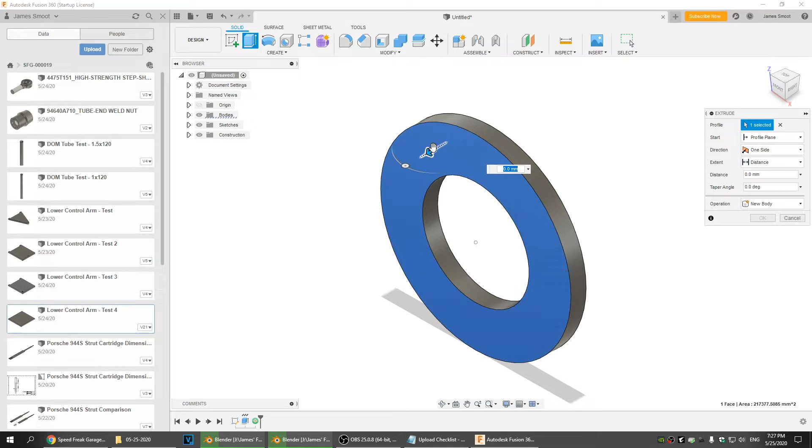Then we need to — and it's kind of funny, I don't remember how wide the original wheel was. I believe it was a 7-inch. So we're going to do 7-inch, 7 minus 2. So that looks about right, honestly. It might be an 8-inch. I want to say it's a 7-inch.

So now you'll notice that although this is correct as far as the offset, it's not correct to where the ball joint really is, which is down here somewhere. So to do that, and it's not going to be easy, we need a 4.5-inch offset.

So I believe I can do an offset plane that's 4.5-inch. That didn't come out right.

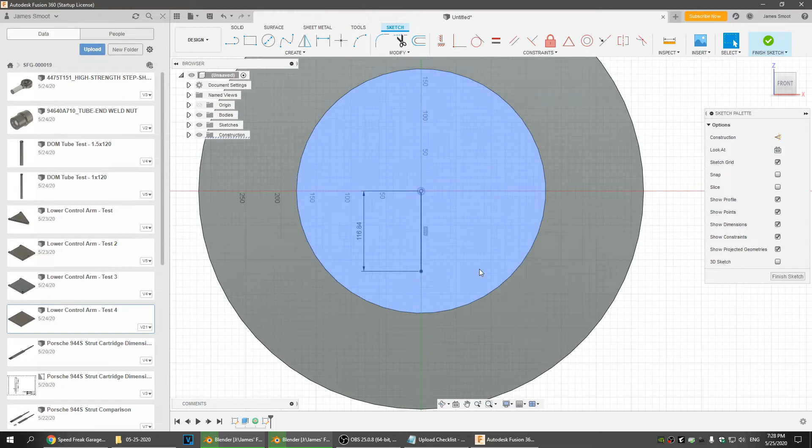And what would be the best way to do this? Okay, let's back up. Create sketch, and then from that sketch we are going to draw a line that's 4.5 inches. Okay, and that seems to look about right, comparable to what we were seeing with the car.

So now we need to finish the sketch, and then create a new point right there. Okay, now we can hide our first point, hide our sketch, and finish off the wheel, which was a 5-inch extra tire there. Okay, so now we have our proper control point. We can save it as rally wheel and tire.

Okay, so we can close that. Now we can create a new design. So what we're going to do...

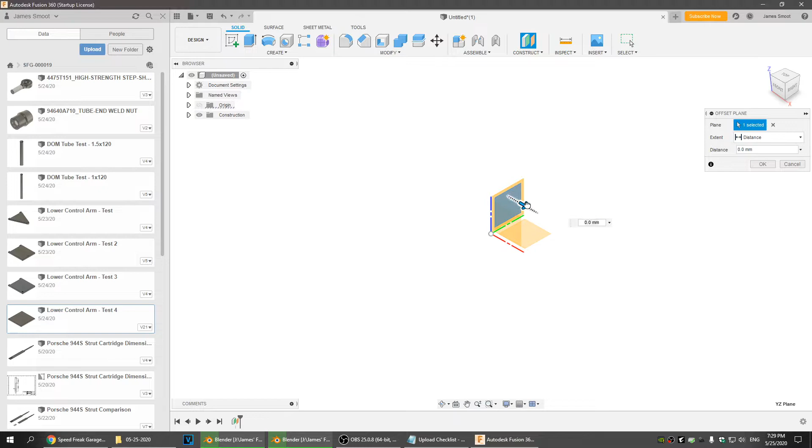We're going to use offset planes simply because this will make this a lot easier. So we're going to create a plane here, then create an offset plane that is 10 millimeters out. Okay, and then we'll create a plane that is 62 millimeters out.

Guys, if you've just finished watching the previous video, you'll understand what I'm doing. 10 millimeters out, then it is 264 millimeters out, and then it is 45.

Okay, so this is the simulation of the vehicle's mounting. So this is our subframe. This is our — let's call it a caster block. I don't really know what the proper term is.

Now we want to create a work axis perpendicular at point. No, shit. Axis perpendicular to face at point. What the f is going on? Okay, might be a little harder.

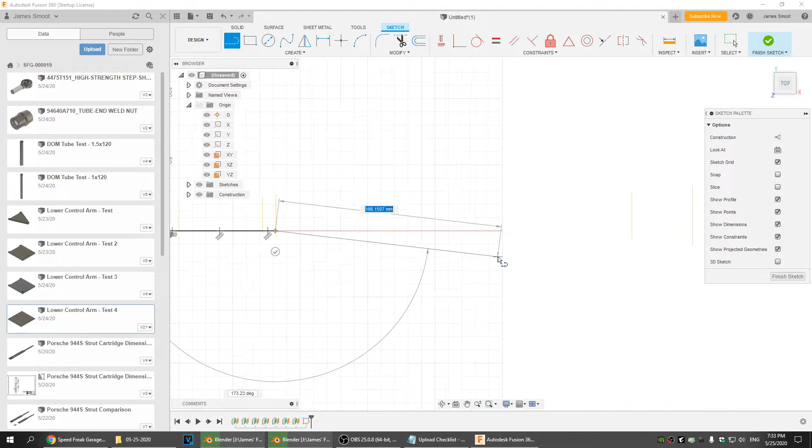So I might have to create a sketch just to get what I want out of this. Not really behaving like I had hoped. Line there, there, there. Should be able to do this whole thing with these construction planes, points, and lines, but this software has some very frustrating limitations that really aren't necessary.

They just don't want to add the feature that's been standard on other CAD programs for a decade. Okay, we're going to call that 10, and that was 62, so we're basically doing the same work twice just to fix the limitations in the software. 10, this is 264, this was 5, okay, this is 365.

Okay, and then we need a line here that is 22. I know this doesn't appear to make much sense right now, but it should hopefully.

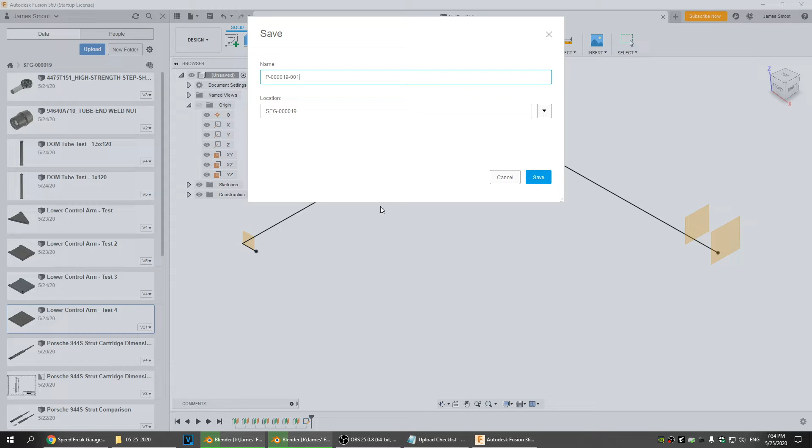We're going to call this... just ignore that, that's something for me. Now I can come back and create the axes that I wanted.

Create an axis through here, here. Okay, then I can create work points here, here.

There. There. There. There. Finally. Here. And here. And I want to go down and create a point here.

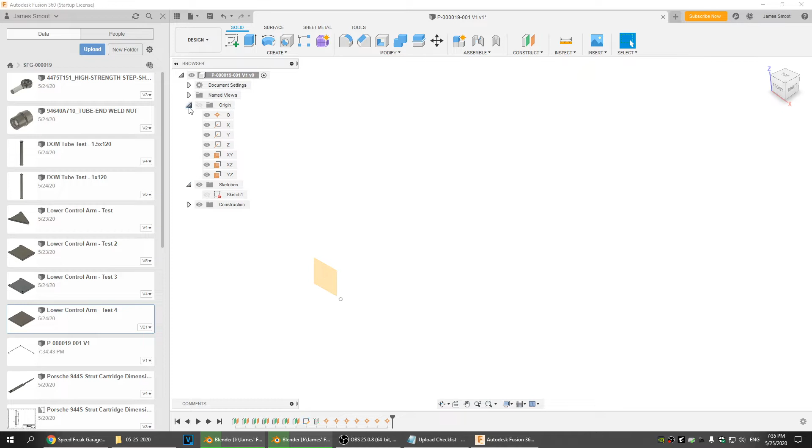Okay, so now I should be able to get rid of that sketch. And then I can get rid of this construction plane. The others I'm going to leave, and I think I might have to keep that axis for now.

Now what we're going to do is come in and start working on simulating the wheel and tire, control arm, and everything. So we're going to bring in our wheel and tire.

Then we are going to create a joint, revolute. It's going to be this to this. Oh yeah.

Then what we're going to do is — I forgot to measure it while it was on the car, but I did some basic math for the turning circle and estimated the steering angle based on that. In this case it's going to have a minimum of -45, I think 45 is actually too much, but a maximum of 45. I think the calculation was more like 40 degrees or so.

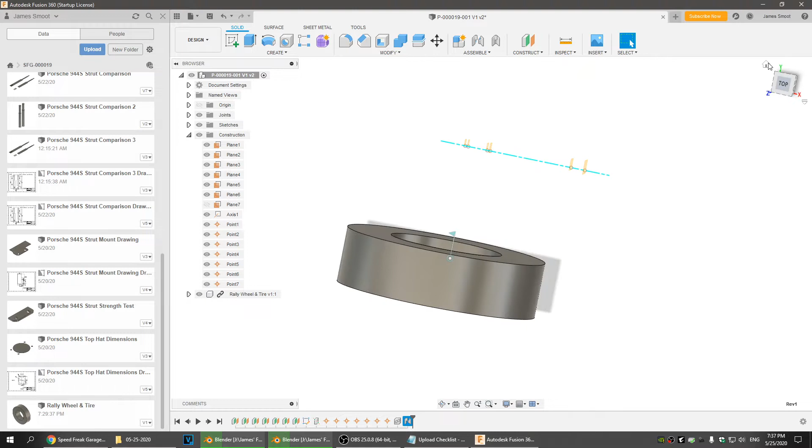I really screwed up, I'm basically going to have to go back out to the car and probably put it all back together to measure my steering angle properly, but this is what we've got for now. So do 45 degrees, worst case scenario steering angle, save.

So now we're supposed to be able to drive this joint. There we go. So we put our wheel and tire in the worst possible configuration, and that gives us an idea of where we can and cannot run our control arm.

Oh, come on. Stay. There it is. Okay.

Now to draw the control arm is going to be a little more complicated, so we need to bring in our Heim joints. For now we're just going to assume I'm going to use the industry standard Heim joints used in most off-road custom suspensions, which are half inch inside with a 5/8 by 18 thread. It's a really big, beefy, very strong joint.

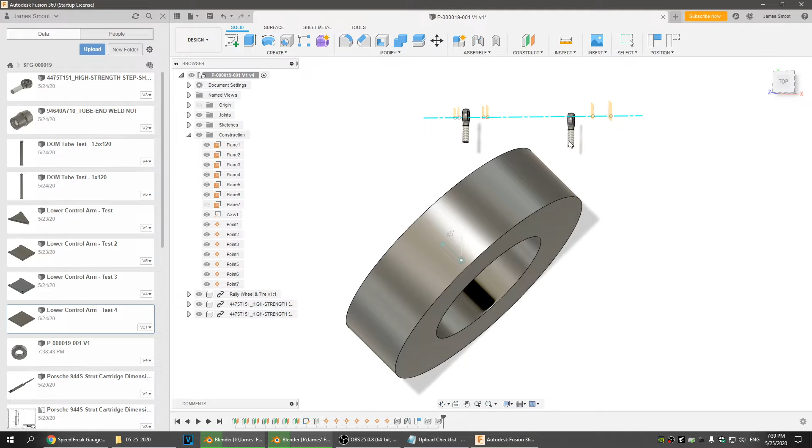Then I need another one. So it brings it in at the wrong angle again. Okay, drag it over for now. And then we need to, come on.

Okay, so now we need to join these and make sure they're rotational. So we grab the center of this, and we're going to stick it here. Oh, that's not good, it's the wrong one.

Oh boy. Can I select the axis? No, shit. Well, that's not good. Okay, what about that? It's not letting me. That's a problem, that is a problem.

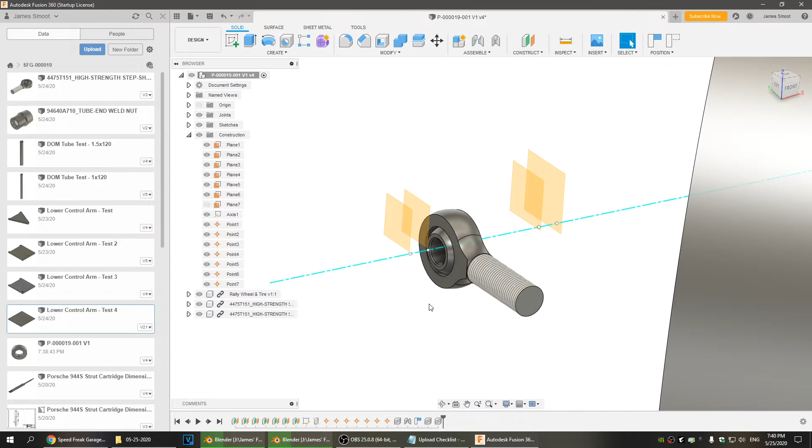If I did a rigid joint there to there... shit. Great, great. Oh man, see, I didn't want to have to do it the hard way. God, that's shit, okay.

There's got to be a way to... alright, let's do this, do planar from here.

Wait, I can't select a plane for a planar joint? What? Planar joint. You've got to be kidding me. Why? Oh, that makes my head hurt, of all the stupid... Yeah, okay, so... that really makes me mad.

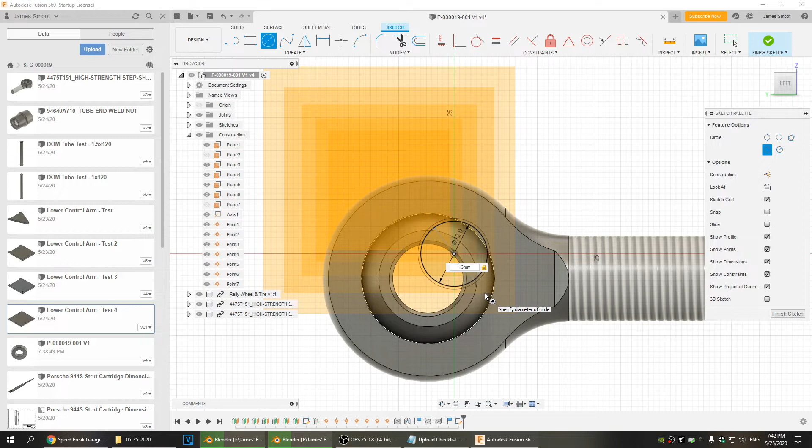We're gonna go -10, okay. Then as built that. Oops. I'm gonna lock this to the origin. No, that's not working either. It makes me so mad. Okay, alright.

Let's... same thing, 12, 20. Okay, extrude. What was it? It was 5. Where'd that plane go?

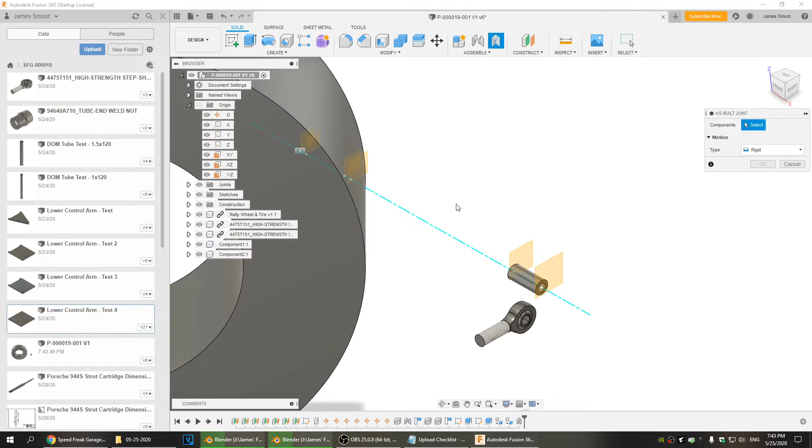Okay, so now we have those two features in there, I think I can convert them to create component. So then we do the as-built joint, which is this component rigid to the origin. Okay, as-built joint, rigid to the origin. There we go.

Now we can do our moving joint, which is the revolute of that to that. For now we're not going to put any kind of spacer in it, although we probably would need one. I don't know if it'd be a good idea to center it here, but this is what we'll do for now.

Now this one, same thing, joint from here to here.

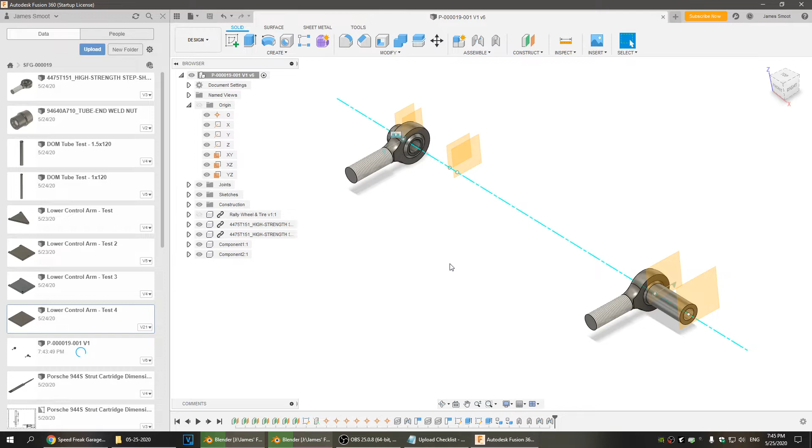Let's get the wheel and tire out of my way for a second. Okay, save. Yeah, I really screwed up by not measuring the steering angle. Kind of not good, so anyway.

Alright, so now we have to add our tube end weld nut.

Another one. So what this does is it adapts the threads to the tube. In this case, we're going to be using some pretty large 1.5 inch DOM tube, which is very strong, twice as strong as what they've used for the factory stuff.

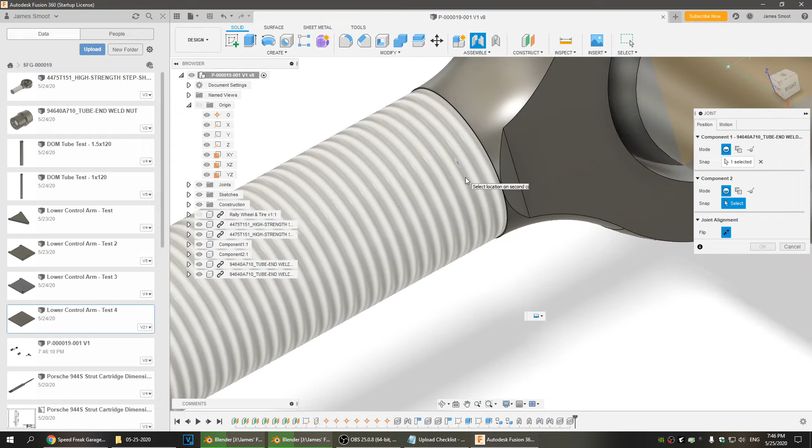So it's going to be attached. Don't give me shit today. There. Okay, this attached there. Okay, before we start drawing, I need to set joints. Where's joints here?

For edit limits. Okay, edits, so that way they can't spin for the time being and mess everything up.

So now we have the location of our ball joint, which is basically straight on this tube, which is not good. Something I'm not sure how I'm going to deal with, honestly, because we need to have a full piece of tube supporting the ball joint, and that's not going to happen with this.

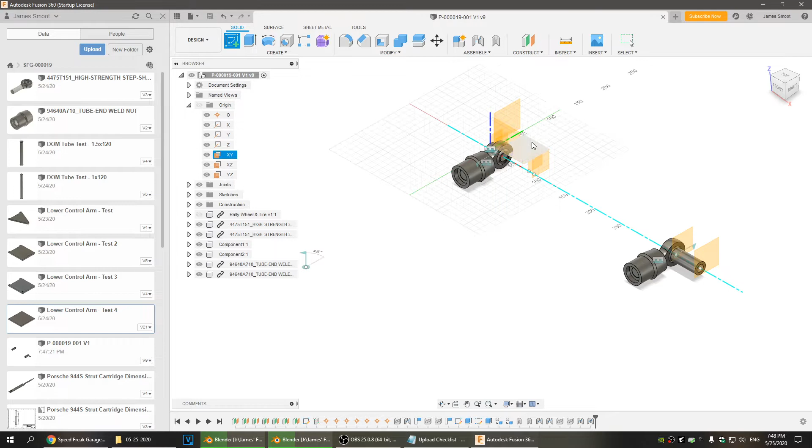But what we can do is create a simple simulation to kind of simulate the shape that we want. So what we're going to do is start a sketch, then we're going to project this.

Let's see, 0.7. Okay, and we're going to project that and that onto the sketch. So then we can go ahead and simulate our DOM tube. So what we'll do...

We determined the ball joint was a 42 millimeter ball joint. Then the DOM tube is going to be a little harder to simulate, but luckily we don't have to simulate all of it. We just have to kind of, well, you'll see.

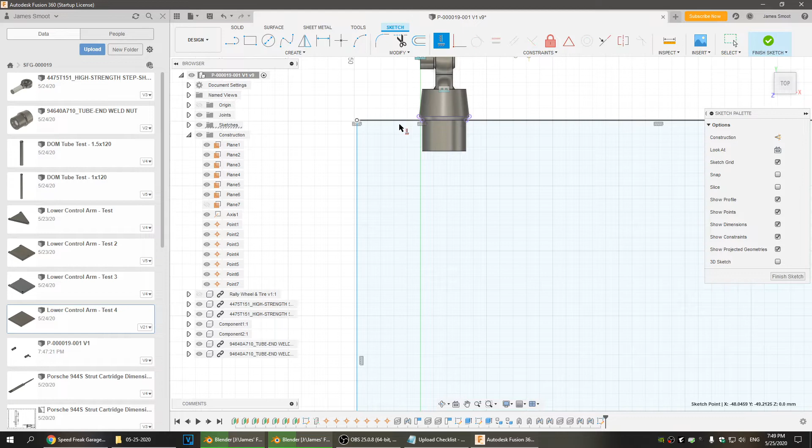So we're going to do that, and then we're going to have to project that and that. Okay, then we're going to limit this to there and this to there. Then if you come back and look at our tire and wheel, oof, yeah, doesn't look so good, does it? I mean, the tire is right there.

It really makes me think I'm going to have to go back and reassemble the whole car back together so I can... I really don't want to do that though. So I can measure the steering angle. I might be able to just measure the steering angle on the right side of the car, because this 45 degrees just, man, it does not give me hope. Like if I say 40 degrees...

It still doesn't give me much hope. Wow, it's really concerning.

Anyway, okay, hide the wheel and tire again, we'll have to deal with that later. So we have, and I can always 3D print the A-arm in full size and install it on the car. I mean, it's not going to hold any weight, of course, but it might help me determine if we've got a problem or not.

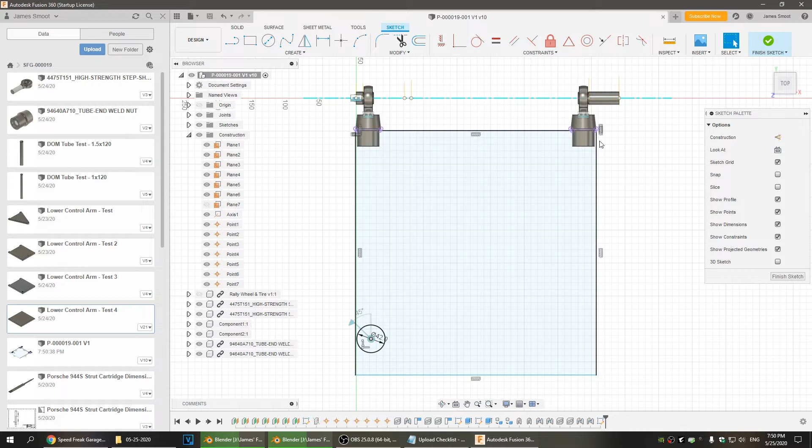So yeah, so we got this, and we've got this. So the only thing we need to do now is just bring this out to like, well, we're only going to be able to, the ball joint, you'll see whenever I have to do the ball joint, but we're going to do this to there. Okay, finish. Now we're going to extrude...

Just this piece. Oops. Symmetrically, and the whole length is going to be 1.5 inches. And we're doing a new body, so it's an independent body. The only thing we need to worry about is this face here, so create a sketch.

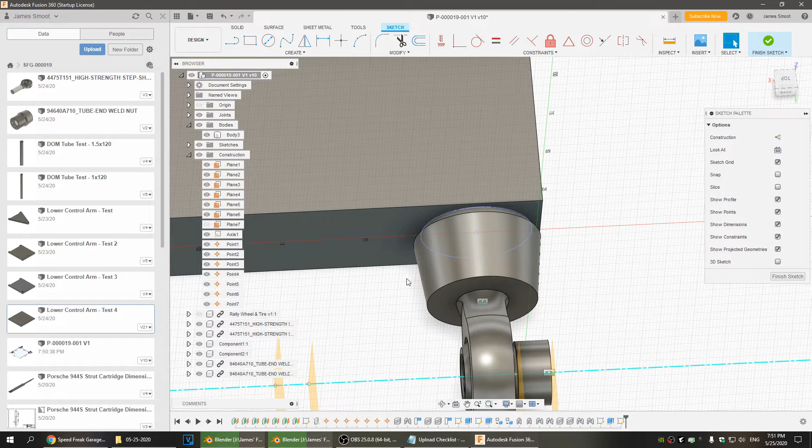And we're going to project this and this, okay? And then finish sketch, we're going to extrude that to match. Oh, that's frustrating. Oops. We're going to cut it in 1 inch to match. So, okay.

So this looks odd, like trust me, I know it looks odd, but it will tell us a lot of information that we need to know. One of the things we need to do first is grab these two edges, 0.5 inch.

Okay, ooh, that wasn't right, hold on. Oh yeah, 7.5, okay. Save, now we should be able to go straight into our simulation.

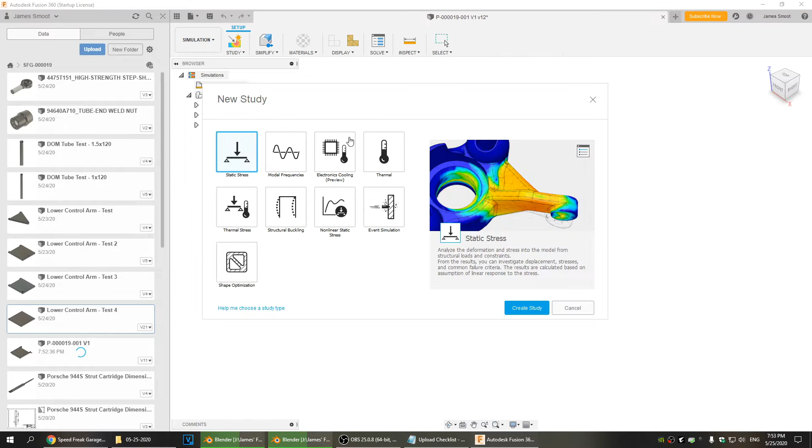So shape optimization, create study. No, that's not going to work. Delete study. Cancel, okay, sorry, we're going to have to...

Thought there was a way to keep certain components out of the study. Maybe not. Alright, we're gonna have to try it this way.

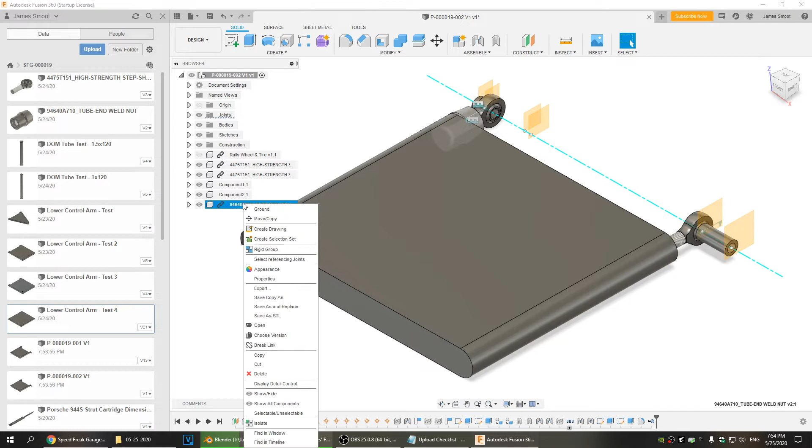We're gonna save a separate file. And then we're going to come in and it's referenced. Oh boy, should be a remove option. There it is, remove. I have to break the link and remove. Break link, remove, break link, remove, break. Okay, so we're just left with this really weird looking piece.

Now we can go to simulate, create study. Okay, material will be, I believe it was 1020 hot rolled. Okay, so we're choosing our steel. Now our constraints will be this and this will be fixed in place.

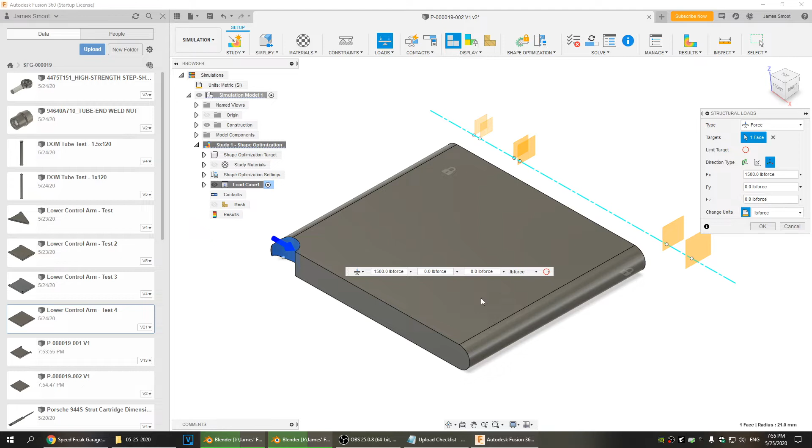Okay, then our force will be in pound force. Let's see. Oh, that's the wrong direction. I think we want it this way. Yeah, so we're going to do half the weight of the car, or 1,500 pound force, which is way more than this will ever see, but we're just going to do this for the simulation.

Okay, save. Now we want to go to settings, mesh, 1, 2, 3%. So it's going to generate a mesh real quick. Normally real quick. Okay, there. So now we have all these little pieces that it uses to simulate.

Then we solve, and I wish I could solve it locally. It won't let you solve it on your own processor. It makes you solve it on the cloud, which is bullshit, because eventually you have to start paying for cloud credits. In this case, it's $1 per credit, so it would cost me $5 just to run this test simulation, not even the final simulation, it's just a test. So that's really frustrating. But it's free for now, but it won't be forever. So I would really hope they add the local option.

Anyway, we're going to run it on the cloud. Should solve pretty quickly. Okay, so we're back. So you can see, just like I showed you earlier, it gives us the same general shape.

Unfortunately, this shape would interfere with the wheel. And I can probably show you that there's a way... like that. There we go. Okay, so we now have our what's considered optimal shape.

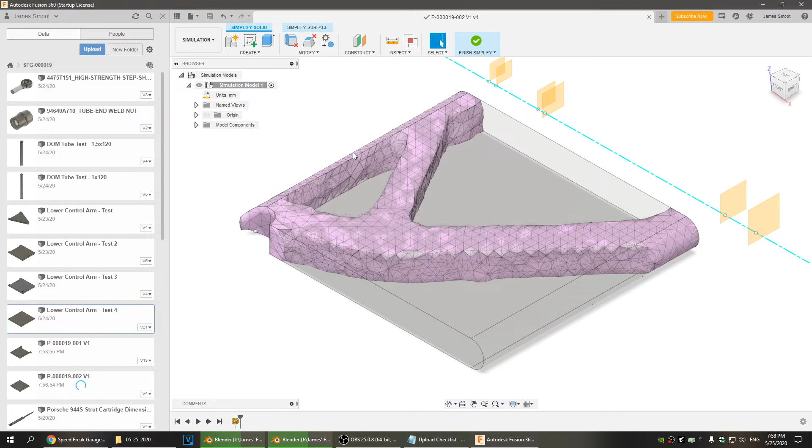And I think we can actually drag this optimal shape back into the main. First, let's kind of clean this up a little bit, shut all this crap off. Save. Okay, go back to version 1. So now we can actually get rid of this body, it's not necessary anymore.

Sketch 5. Okay, save. Then we bring in our... what is this one? Oh, wow, I'm very confused now. Oh, shit. It's not supposed to be that difficult. What is the deal?

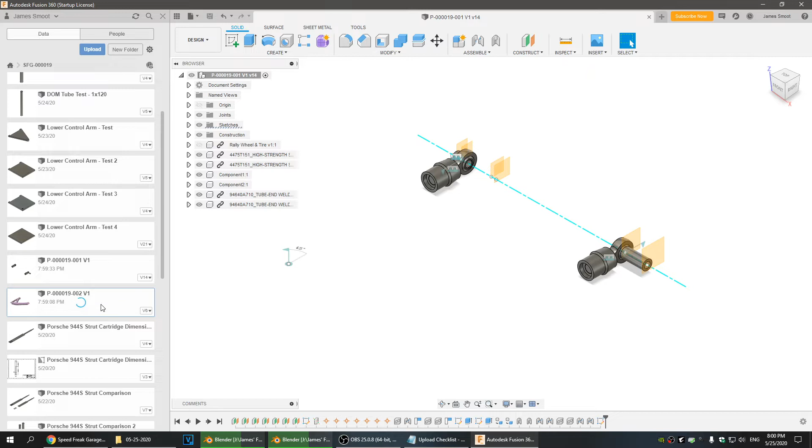Results, convert. Oh, that's why. That's why. There we go, there we go. Save. Okay, now give it a sec. Now we bring it in. There's our optimal design control arm. But look at that.

Rally wheel and tire is right there in it. And again, I'm still a little unsure of if I have the steering angle right, because obviously 20 degrees is completely wrong. But say the car can only steer at 30 degrees, well, then I don't have to deviate from my shape too much. And you have to miss all of this here.

So it's going to be kind of a pain to figure this out without going back out to the car. And yeah, great, just great. I'm gonna have to go back out to the car and get my steering angle figured out first. But I know that we're gonna have issues with all of this, so it's gonna be tough. It's gonna be very tough.

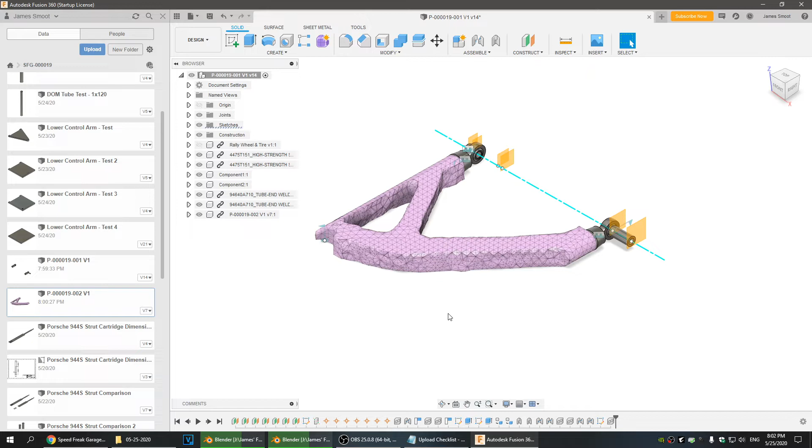Let's see. And the other problem is the center of the ball joint is just, I don't know, it's going to be an issue. Well, it almost needs to be over here with the two pipes behind it, but I don't think that would be strong. So I can't put the Heim joint directly up against this because it won't have enough room to pivot.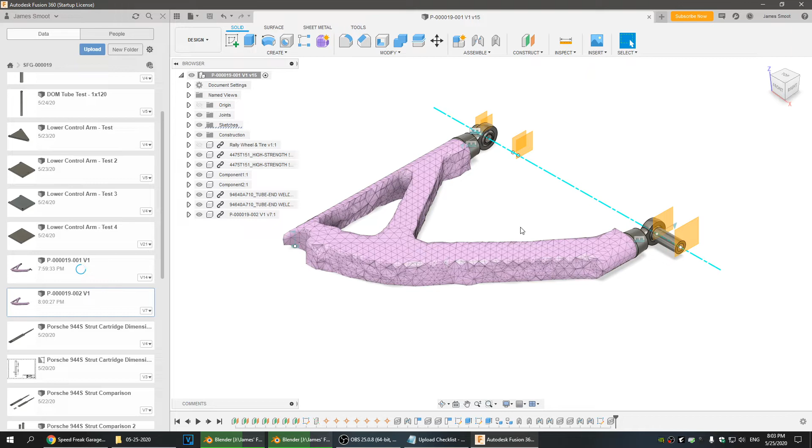There's a little bit of math you can do to figure out how much room it needs and just move it over a little bit. And same for over here, take this one and move it over a little bit. Granted, this one isn't the right size for this. So, but yeah, I'm gonna have to go back out to the car, measure the steering angle somehow. I don't even know how I'm gonna do that. And then I will come back and update our wheel and tire simulation so that it's correct.

Okay, so we're back, and based on the measurements I took, it looks like about 32 degrees, but we're going to be a little safe and do 35 degrees. I think I'm just going to have to suck it up and 3D print a mock-up to make sure that it clears. Granted, I don't know how well a 3D printed mock-up would withstand even turning the wheel, but we'll figure that out later.

Alright, so we've got the wheel at 35 degrees. Now you can see that still leaves us with quite a bit of a problem. So what we're going to do is get this out of our way.

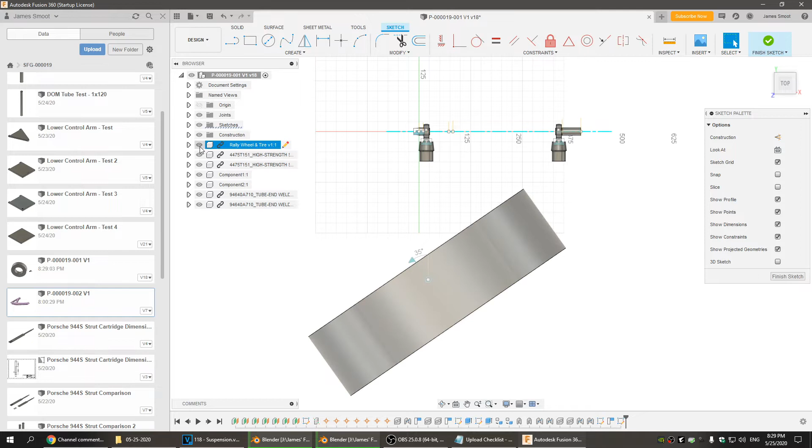And we're going to do what we did before, which is create a sketch. Then we're going to hide our wheel real quick, and we're going to project that. It's going to be a little more complex this time, so just bear with me.

We are going to draw our circle around the ball joint at 42 millimeters. We're going to take our rectangle, just draw it out here for a sec. And we're going to align it back up like we did before - there to there, there to there, and here to here. Now we have to make a clearance for the wheel.

If we look at this design here, you can actually see it left space here. So wherever this hole was, basically, it left space for it, which I won't pretend to understand why, but we're going to have to do the same thing. So what we'll do, we know we have a 1.5 inch pipe.

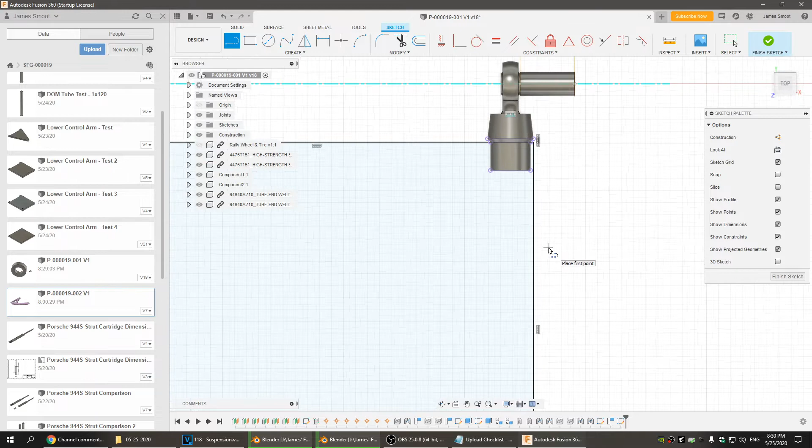So we're going to draw a line - hold on, I gotta project this. We're going to draw a line. It's going to be 1.5 inch to simulate the pipe size. And then it's going to come over here, and we'll have to do a little math, but we're going to do 2 inch for now. We'll come back and fix that later.

Then we need to turn our wheel back on. You can see we're already very close, and we might have to tweak that a little more. Let's do 1.5 inch. Okay.

Now what I'm going to do is draw an arc, and it's just going to kind of sit here for now, with a 5-inch radius. That's because a friend of mine in town has a pipe bender, and he believes it's a 5-inch radius. If it's not, we can always come back and correct that later, but for now, that's what we're going to go with.

So we are going to connect this to here. Well, I guess we want a tangent so we can kind of see what I'm doing. And then we want to do the same down here.

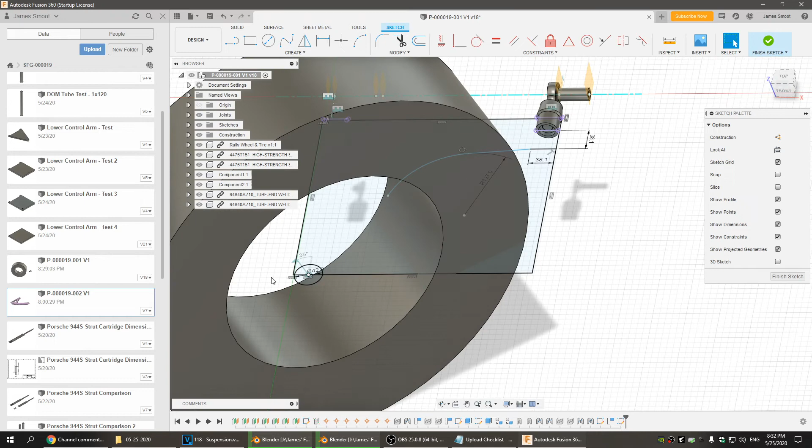We want this pipe to clear the wheel just enough to basically have room. And what we're doing is we're going to have to draw a line here. Then the dimension will have to be 3 inch since we have two 1.5 inch pipes coming together. So for strength, we want both pipes to be fully formed.

Okay, so then we're going to dimension this off. Again, we want to leave some space, so maybe 1 inch. That's probably not enough actually, because the pipe's gonna... okay, let's do it this way.

Let's draw the line from here to here, and then tangent that line down to the edge of the ball joint. So the pipe will extend pretty much to the edge of the ball joint. Again, there's some tweaking we can do to allow for welding space and things like that, but that's what we're going to go with. And then we're going to bring this line down here, and it's going to tangent to here.

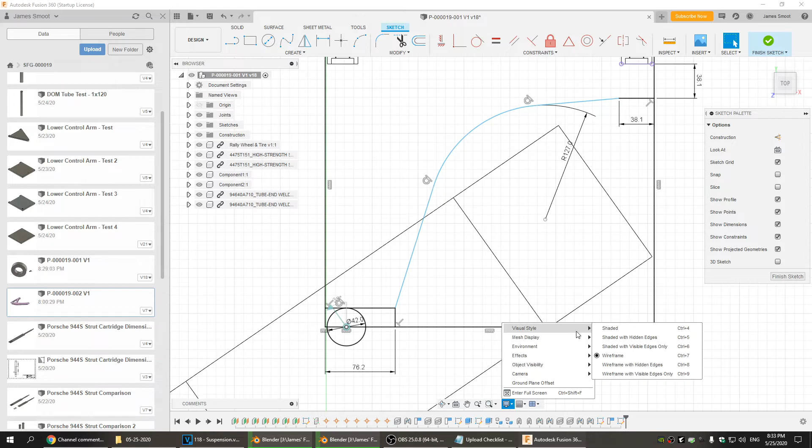Okay, so now I need to change our display settings to wireframe. So see there - actually that doesn't help me much, does it? Sorry, let's go back. Yep, we're just going to have to do it this way.

So we can see that we have a contact here on the barrel of the wheel, and we can kind of move. So what we want to do is develop the strongest possible link that doesn't contact the wheel. But then, of course, we need - well, what would happen if I projected this onto the sketch?

And then if I put a point, I can't do an intersection point, so I'll just zoom in really far and guess it, then lock it in place. And then do the same over here — zoom in really far, kind of guess that point, lock it in place. Okay, so now we can turn the wheel back off to get it out of our way, and we've got our 2 points.

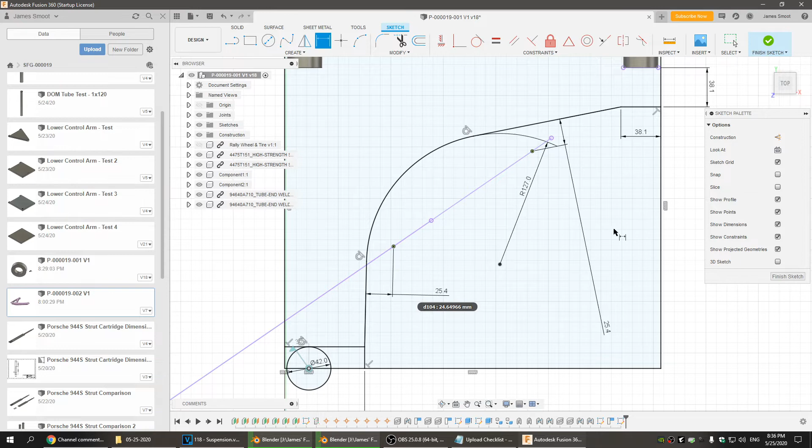So the original vehicle had a, what you'd call, I'm not really sure how to describe it. It had a... can I dimension that to that? I can. It was a 1 3/4 inch clearance, so let's say we do a 1 inch clearance — let's tighten that up. This one would be the same, so we'd do... oof, that's not gonna work. There we go, we do 1 inch. So we're giving ourselves 1 inch around.

Okay. Then we're coming down here like this. Alright, so finish sketch. Gonna save.

Now we're going to extrude this profile, this piece, and this piece. And we're gonna... ooh, I made a mistake. Well, you'll see here in a sec, but — symmetric, total distance, 1.5 inches. And then we're gonna come through and do our radiuses so that everything...

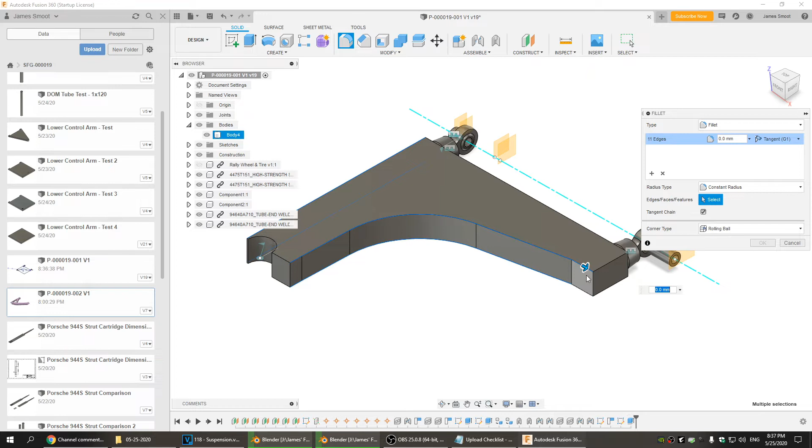Ooh, that didn't turn out like I wanted. That's also not really what I wanted, but how can I fix that? That should be pretty simple to fix, actually.

Create our sketch. We will come on, project that and that. Okay, and then we're going to hide them. So we can then fix that.

First thing I'll do is take this and, whoops, extrude it out. What did I do, 2 inch? No, 2.5. Well, okay, that's a little confusing. Hold on, we're gonna have to go back. Back. 61.9125. Okay.

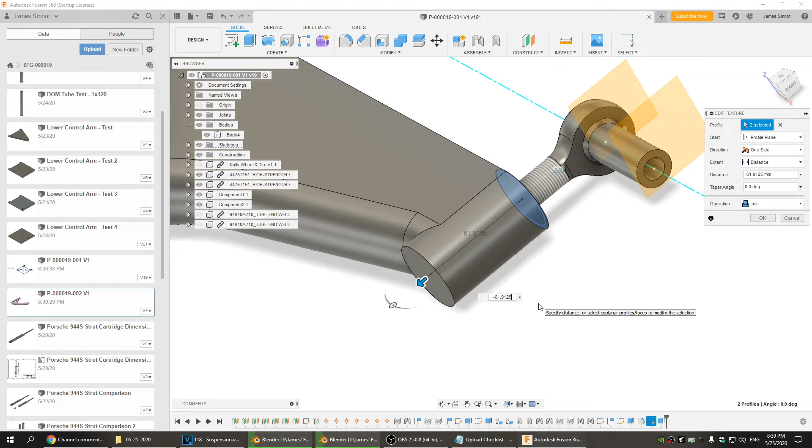There we go, okay. So that basically simulates the tube — this tube running into this tube. I actually, crap. Nope. Okay, you guys kind of see where I'm going with this, hopefully. So, and it's actually kind of looking like the original, which I don't know if that's encouraging or not.

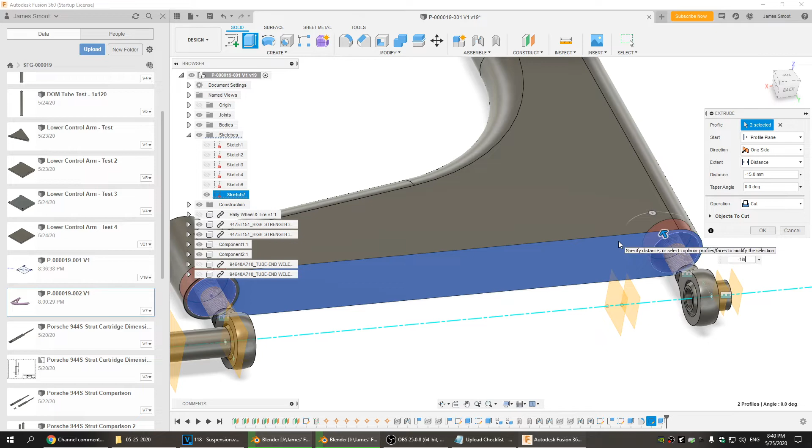So let's see, we've got that, we've got this, and oh yeah, and then I need the holes, so we've gotta go back to these sketches, and they just go down an inch, negative 1 inch. Okay, I can unhide these.

Okay, now I'm gonna override — well, actually, no, I will not. I will save it as a totally new one.

And we have to go through the whole process again. We have to break, remove, break, remove, break, remove, again and again and again.

Okay, so now we're only left — and we'll turn off all this construction stuff. And there's a sketch that's on — turn the sketch off. Okay, go back to number 1 for a sec so I can turn that sketch off that I left on. What? Crap, something's going on. There we go, okay, sketch off.

Okay, and then, oh yeah, so the thing — yeah, got a pretty good amount of room there. Let's see if it'll tell me what the minimum distance is from here to here. 14 millimeters, half an inch. Wow, probably too close, especially for suspension flex and, you know, oof. But it's a prototype.

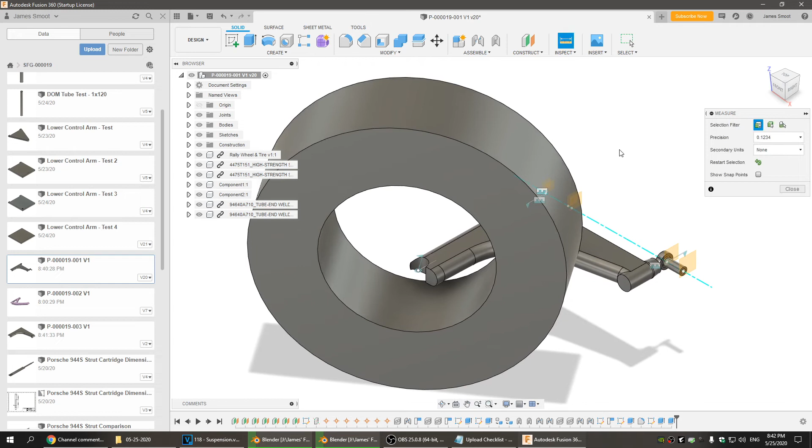Alright, save. Hoping this is assuming it's a 5-inch radius — if it isn't, we'll have to come back and redo all this. But anyway, okay, close this. Go back to here. Now we go to simulation, optimization. Why did it turn all that stuff back on?

Okay, and so what we're gonna do — materials, we're gonna do steel, and it was 1020 hot rolled, okay, because steel, different types of steel have different properties, of course. So constraints — fix there and fix there, okay.

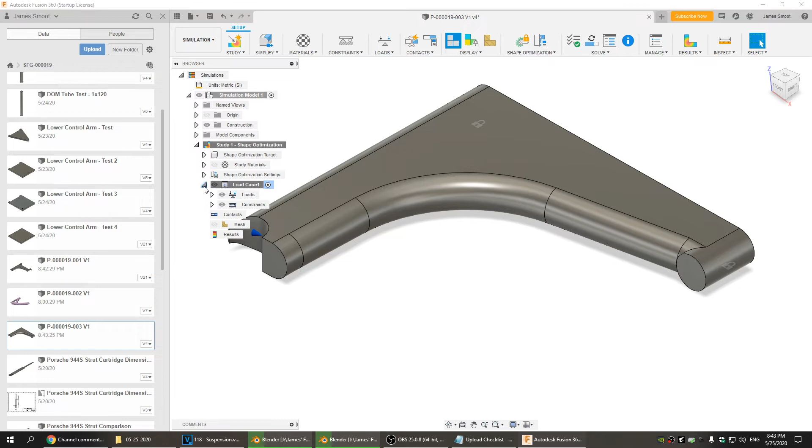Save this again. And then the load, we'll do the same load as before of 1,500 pounds. Whoops. 1,500 pounds. Okay, double check that. What is the deal? Okay, 1,500. Okay, 1,500 pounds. Save. Now we gotta set up our mesh to 3%.

Okay, generate. It's sad because I'm pretty sure my processor on my computer is faster than Autodesk's servers. So yeah, it's frustrating that they solve it for me and I can't just solve it myself. So we're going to go to solve — it forces you to do it on the cloud. We're going to click solve, and then I will come back when it's done.

Okay, so we are back and it's done, and it's basically telling us — it's telling us that we want... oh wow, that's a lot more complex result than I expected. It is a much more complex result than I expected. So it's...

Go back. So it wants us to connect... wow, so it's basically saying — trying to understand these results. It's basically saying it doesn't want us to have this extra here for whatever reason. But why?

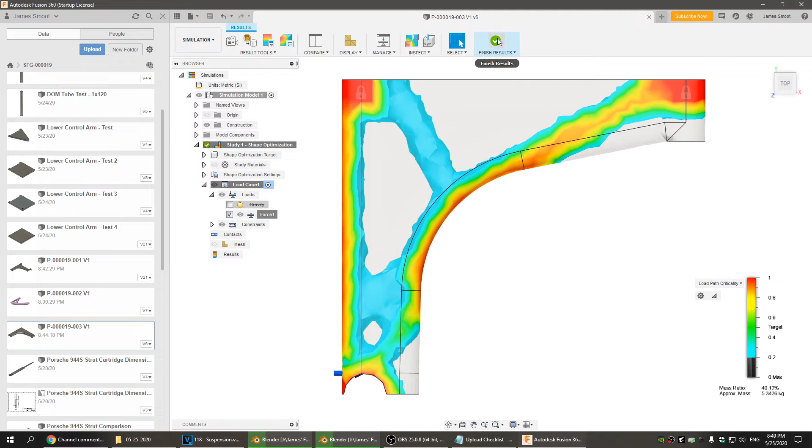Okay, close that, go back to this. Okay, I see, kind of see where it's going.

So we're gonna have to remove this body. And then we're going to create a sketch here. We're going to project this and this, that, that, project that. Okay, so now I'm going to create the pathways to build the tubing, if that makes sense.

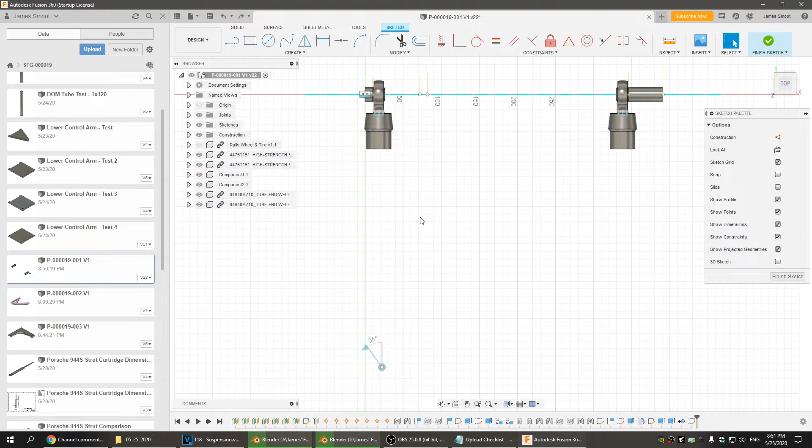Or wait, hold on. No, I'm doing this the hard way. I'm gonna delete that. Delete that. Delete that. Delete that. And this. Okay, sorry. Okay, we're gonna keep all this because I actually need it. So I'm going to develop.

See, we're gonna project this center and this center. And then we're going to draw a line from here down to where we believe the ball joint is going to end. Of course, we need some room for welding. So that's obviously not going to, that's going to be too much, but we'll deal with that later.

And then we're going to, this line's going to have to be fixed. So it basically is saying that it wants me to, oh man, this is going to be a tough one. I'm gonna have to redraw these lines.

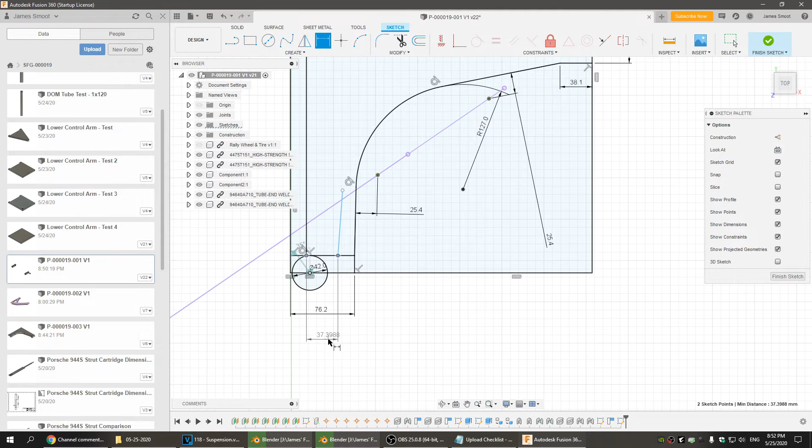So this is just a random line. I don't want any constraints on it except here to here is gonna be 1.5 inch. Okay, then we're going to have a 3-point arc. It's just random. The radius, the arc is 5 inches.

This needs to be tangent. Can kind of move the arc around a little bit now. Okay, and then I want a line from here. See, I don't know how long this has to be. I would assume that the line has to be, let's say if it's 1.5 inch, that's probably too short. Let's do 2 inch. It's a 2-inch line.

And then it wants this to come up. So we would have to draw a line from here to here, tangent, and then we would want the dimension from here to here would have to be 0.75 inch. Okay.

Really, let's do 1 inch. Let's stick it in the center here. Okay.

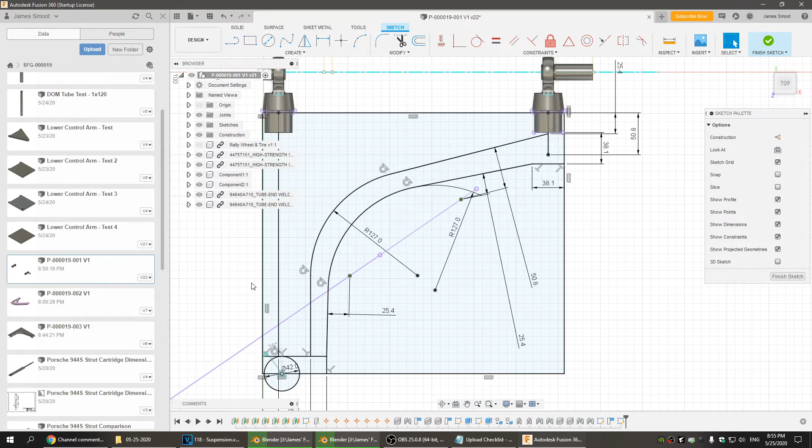We have that pipe, and this pipe. And then the results. As crazy as that looks, I wanted it from here to, man, I don't know what angle that would be.

Let me see if I can guess that angle here. So, oh, okay, okay, I see, 90 degrees.

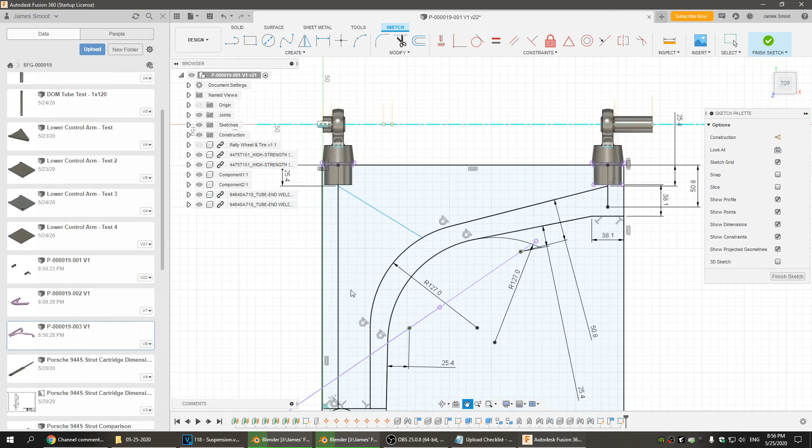So we want a line that goes to here, and then it will have to be 1 inch down, just like this one. Ooh, that's not really working the way I wanted to.

I don't really have any other way to do it though. I'm just gonna have to approximate what it wanted. So let's do, oof, no, that won't work. Okay, I'm gonna have to just half-ass it. Can you do perpendicular to, nope.

No, it didn't work. I could just do 45 degrees. I know that's kind of a cliche, but I'm not really sure what else I'm going to be able to do for now. Okay.

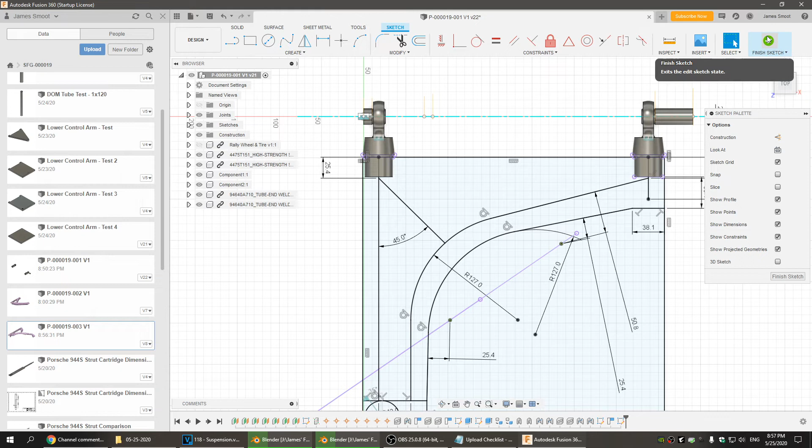And the sketch is invisible again. Okay, so now we have to create sketches. I'm going to have to create a point there.

Ooh, a plane along path. Did they finally listen to people and add what we wanted? Oh, hey, they did. They finally added the plane along path, which is what people have been asking for this whole time.

Okay, so check this out. So if I create a sketch, and circle it 1.5 inch, and sketch... nope, I gotta project it. Yeah, okay. 1.5 inch. Okay.

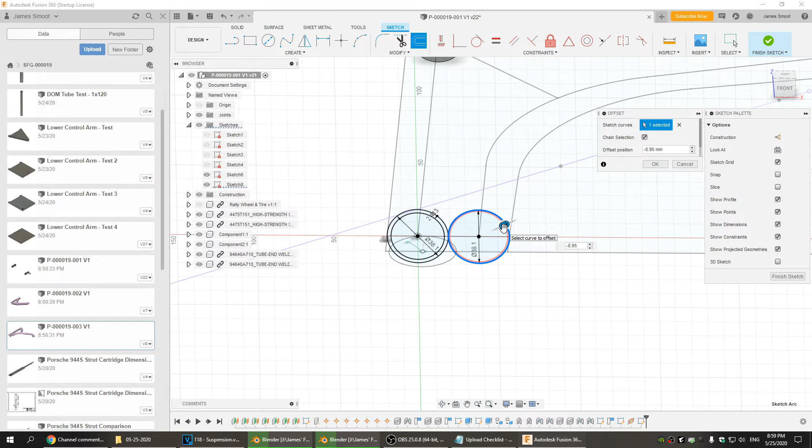Then I need to create the wall. And in this case, we're just going to go with 0.095 inch wall. For now, I probably will have to do a thicker wall once I've run the simulation and see if it's strong enough, which I'm already going to guess it's not going to be strong enough. We'll have to do a thicker wall, and then these tube adapters are going to be a problem, but we'll have to deal with that later.

Okay, so now what we want to do is sweep this profile along this path. Okay, whoa, where'd my sketch go? Then we want to sweep this profile along this path. You guys see where I'm going with this? Yeah. Okay.

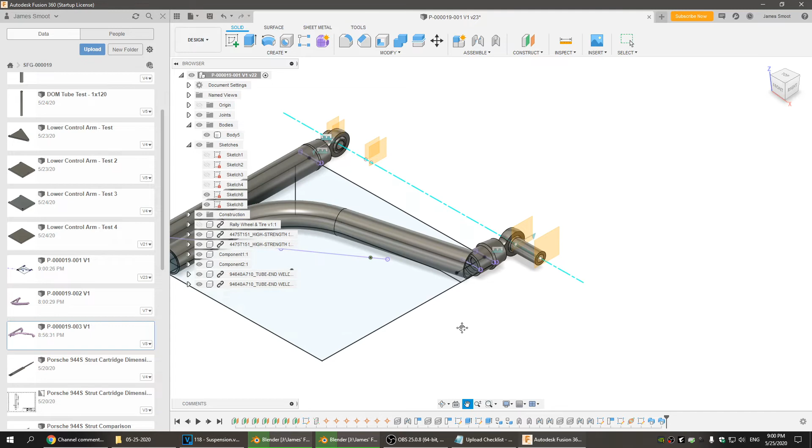We want to join to the original body. We only want one body, otherwise the simulator's gonna have a fit. We got to take care of this problem here in a second.

Okay, so now we want to create a plane along path there at 1. Okay, and then we want to create a sketch, which is 1.5 inch, and then we want to do negative 0.095 inch. I think it was 0.095. Crap, I hope that's right.

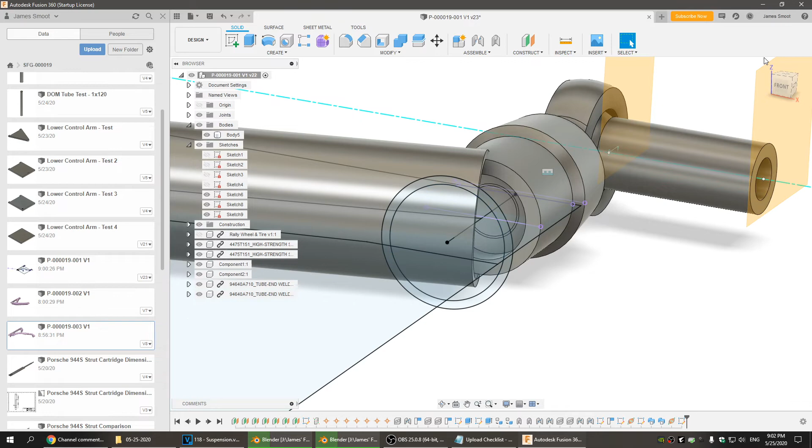This is diameter 33.274. 33.274. Okay, good, I did it right. Okay, now what we're going to do is sweep this profile along this path, join. Okay.

Okay, and then we have to come back and sweep the inner profile along the path, and we're going to cut it. That way we have a hollow tube in there like we want. Okay?

Got a couple more small things to deal with, which is this piece here, which almost doesn't even look necessary. Like this piece here, I don't like how far away it is. I don't know, it's leaving room for this weld here, but it doesn't really leave much in the way of clearance on anything else.

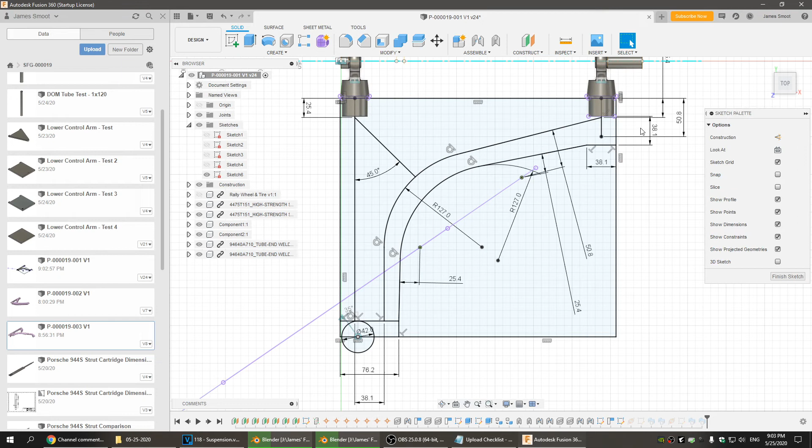So I could probably go all the way back to... nope, not that sketch, this sketch. If I change this to 0.75 inch and hope the whole thing doesn't explode on me. Same here, change this to 0.75 inch. Finish sketch. Okay, so now it's much more balanced.

So see, you have room here for the welding and here, even though it's probably going to get kind of caught up in this weld. And this is a little better. It's still kind of junk, but anyway, so we want a plane along path.

No, zero. Okay. And then we're gonna create a sketch, and we're gonna do 1.5 inch. And then we're gonna create the offset of 0.095, make it a 0.095 inch wall pipe. Finish sketch.

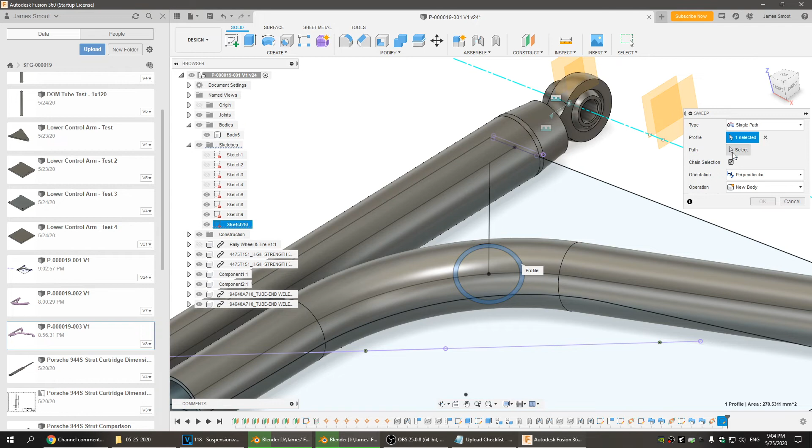We are going to sweep this along this path. Join. Okay. So that actually doesn't look so bad. It does tell me that I can go much higher up over here to try and get a little bit more distance.

So we're going to go all the way back to here. We're going to do 0.5 inch. Really going to get up in there. There we go. Now it's more even, and we got a little bit more support here. Okay.

And oh yeah, we have to go back and clean out the... where is it? Sweep. We got to sweep this along this path and sweep this, whoops, sweep this along this path. Okay.

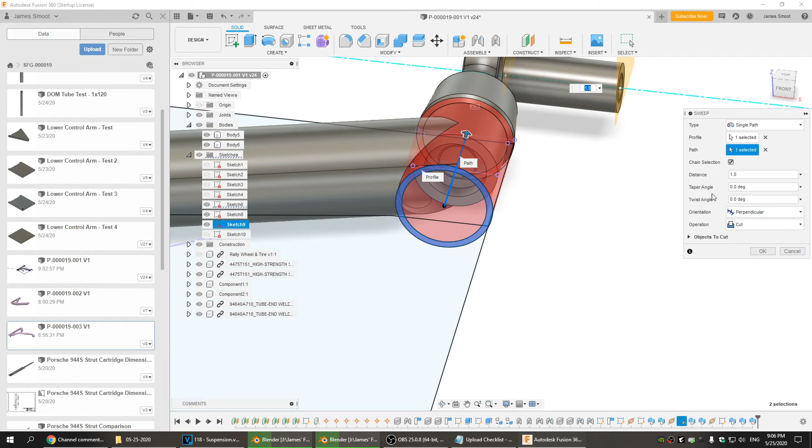But it kind of screws me up because now I have to come back and sweep this one again. Okay. So solid pipe, solid pipe, solid pipe. Okay. Think. Yeah.

Okay, so there's our control arm. There's still a couple more things to do. In this case, we need something to connect the ball joint. And so I won't get into it too deep, but there's a very specific way that we're going to have to connect the ball joint, and I can't really be too specific about it until I can actually get the ball joint in my hand to model it in 3D.

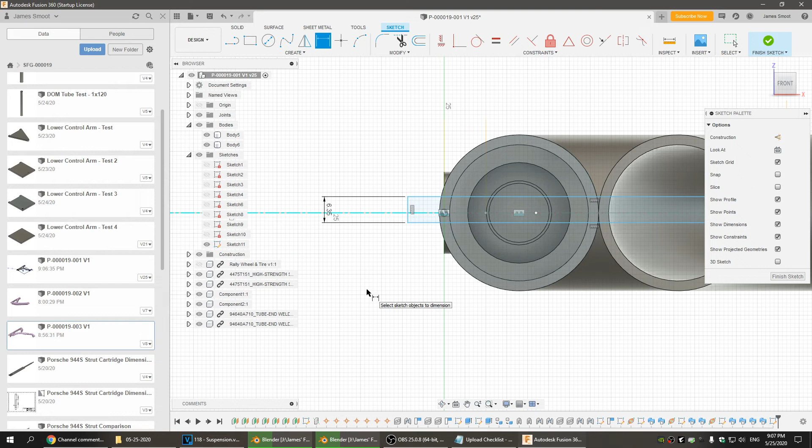But we're gonna basically have to cut a slit, and in this case, if we do 0.25 inch steel plate, so 1/4 inch steel plate, I think that'll be thick enough. Again, I don't really have any way of knowing until we actually get further along in this.

But what we're going to do is we're going to, whoops, go back. We're going to be welding a steel plate into the tube, and that will prevent any kind of flexing with the ball joint. So I think this will be 1 inch. So we're going to leave a little to be welded.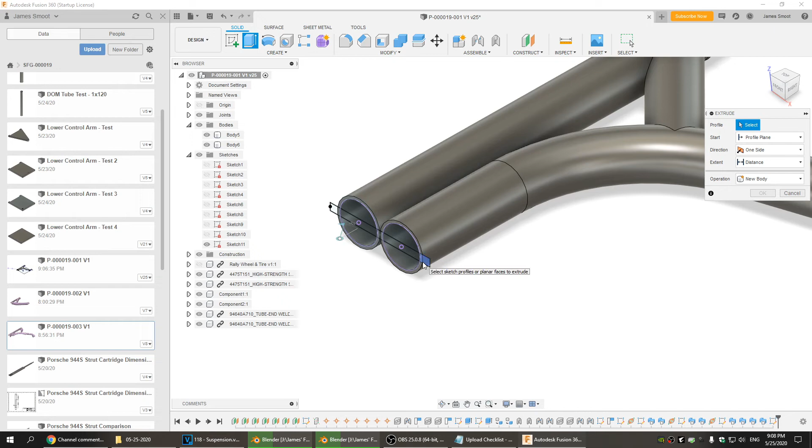Oops, I have to project this dimension here to here. Do 1 inch. Okay. All right. We're going to basically just extrude all this together. And we're actually going to join the pipes together like this.

The problem is we need to go back and take a look at our wheel and tire, make sure we're not... ooh, yeah, we're getting close to that wheel and tire, so I don't know, we could do -2 inch. I don't know if 2 inches is enough.

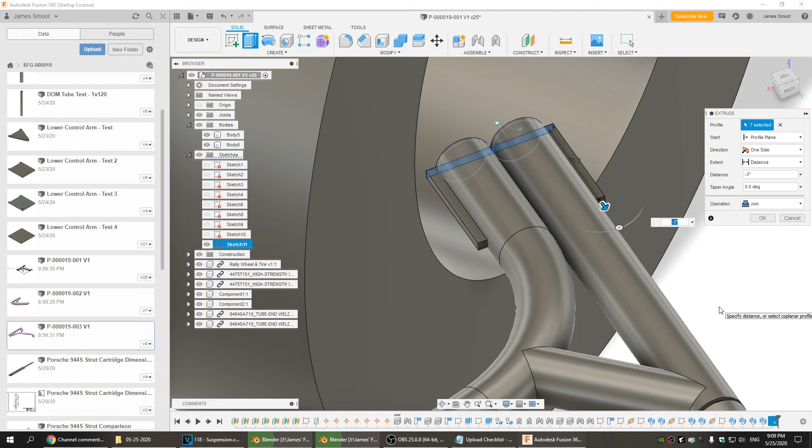Mm, 3 inch. I'm not liking that 3 inch. It's getting really close to the wheel and tire. I don't really know how much we need for it, so let's do 2 inch for now. Let's see what happens.

So we now have everything joined together. Now we're gonna save as version or part 4. Save. We had some issues with that before, so we're gonna close everything and reopen.

Now we have to do the same thing again. Break link, remove. Break link, remove. For whatever reason, the construction planes don't seem to keep their memories, but alright. Save.

Ooh, actually I probably should have. Damn, it's too late now. What should I do for that? Because it's gonna make a difference in the strength. Well, I'll run the simulation like it is for now. I can come back and fix that later.

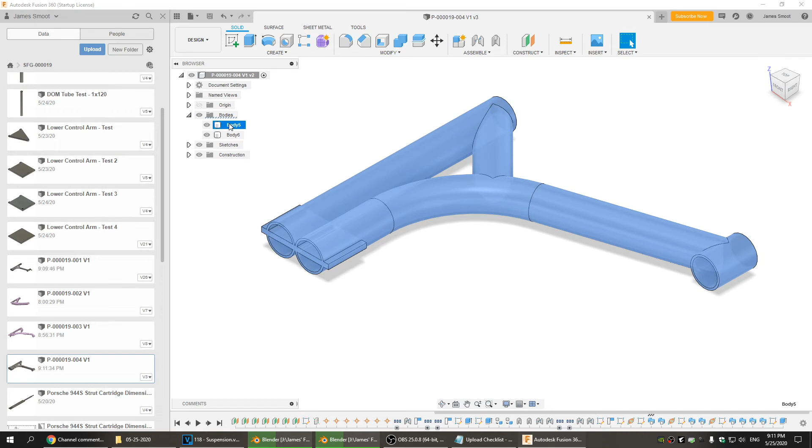What's this body 6? What the hell is body 6? How did that create a new body? Is that body 6? Okay, that's very confusing.

Alright, remove. Weird, okay. That also means I have to fix this too. Remove body 6. Okay, save, close.

Alright, go back to the simulation. We're going to go with our steel, 1020 hot rolled.

Then our constraints are going to be a little different this time. And this is why I'm a little worried about the simulation integrity, but we'll fix it up if it doesn't look so good. So we're just going to constrain them here as if they were welded to those nuts. It might actually be more realistic, but we'll find out. So then the load will be spread across here, which is correct. That's kind of how we're going to end up having to weld that ball joint in.

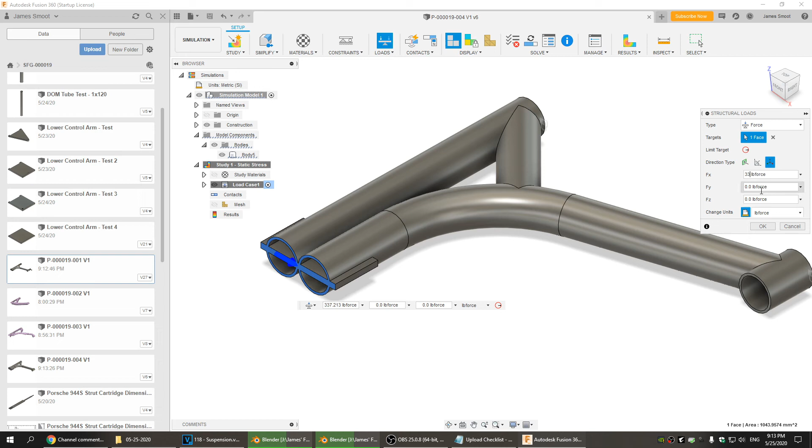And we're going to go 1,500 - whoops, that's in newtons - 1,500 pounds. Okay, save. Now this mesh is probably going to be a problem. Please compute. I'm a little worried if it's gonna have issues with these pipes touching. No, good, the program was smart enough to realize. Okay.

So now what we do, we go to settings of adaptive mesh refinement, set it to high. So it'll make the mesh more and more accurate depending on where in the model the stress is, to give us a more accurate result of what's going on. Save and solve in local solve.

So this one it lets you do locally, luckily. You can see it prepares the model, everything's generated, and it's going to solve, and then solve again, and then again. It's going to solve 6 times to get the best result. I'm going to pause, and we'll come back when it's done.

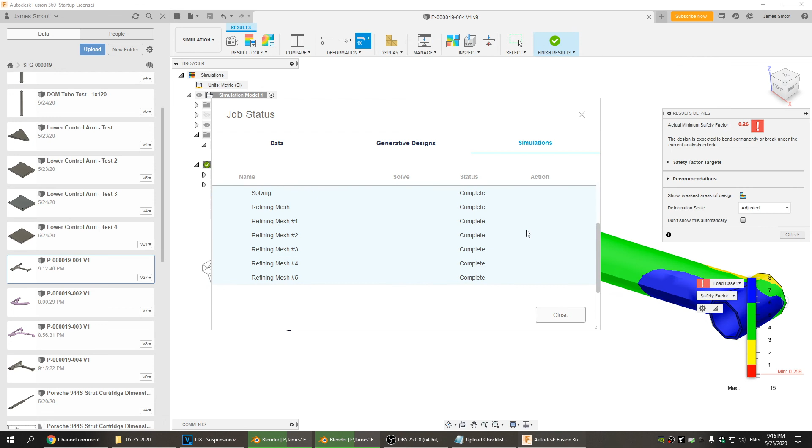Okay, so we're back, and you can see that it solved it 6 times, and we get this nice little diagram. And it says the safety factor is 0.26. So I want anything with a safety factor under... so anything under 3,000 pounds.

So we are actually - and I'm not surprised - this here is not doing well. There's a way to... I thought there was a way to change the scale.

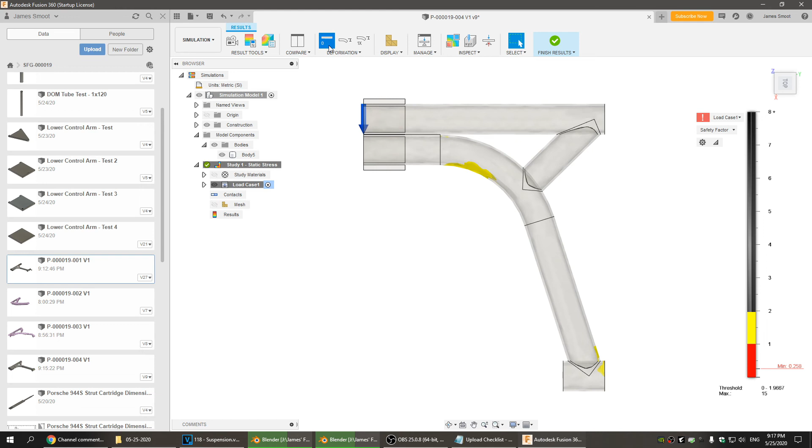So if we look at this, this is the original shape and the actual shape. See how it kind of bends a little bit? And then this is like an exaggerated view, kind of showing you what's happening. But this is the actual, which is very little. So basically here we're showing that this part here failed.

This part here failed. Okay, well let's just go down to 1 then - anything that couldn't handle 1,500 pounds. So really this, which isn't a concern. It almost looks like it. And then this, which is of course just an anomaly. But then everything else, we're talking 3 times, so that's 4,500 pounds.

That's 6,000 pounds, I mean we're talking... and all this is very strong. You can see how this pipe here is actually lessening the stress here. Now the one thing I don't like is the mesh. See how the mesh isn't very accurate?

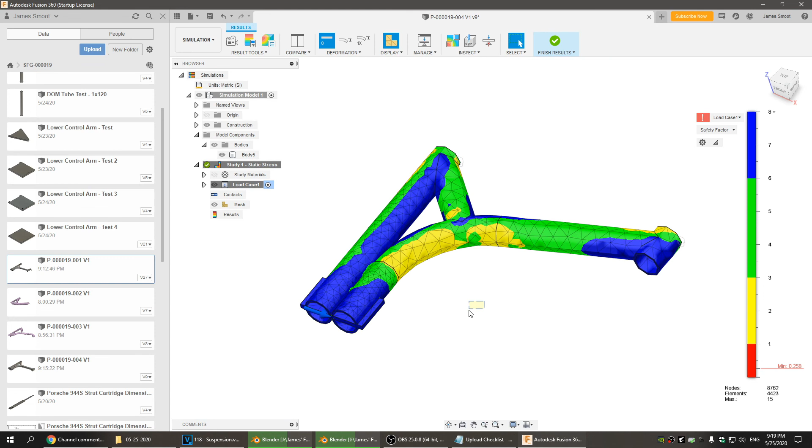It's doing that because it thinks all the stress is concentrated in these little areas. I might have to redo it with a more accurate mesh. Let's finish results, and we're going to have to go back all the way to design, and actually put these back in. I know you're like, well you just removed them, but just bear with me here. So we're going to joint fixed, we're going to do that to that, and then do that to that, and you'll see why here in a sec.

This should make the simulation much more accurate, and it's a little harder to calculate. So we're going to regenerate our mesh. You can see the mesh size here is really not good, so I'm not liking that.

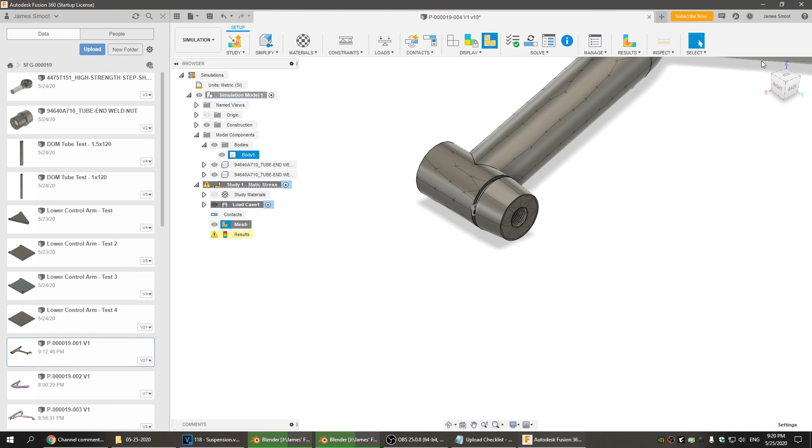Solve, whoops, settings, where's our mesh option? Oh wow, yeah that's awful. We're going to go down to like 3% and regenerate the mesh. No wonder it was... there we go, look at how much... now this is going to take a lot longer to solve.

So what I'm going to do is turn off adaptive mesh refinement. Well, do I want 2 of them now? We'll see how long it takes to solve just with 1.

So we have to create a contact, between these two, and the selection set is going to be in here and here. Oh, cancel? There's already contacts? What? It automatically created contacts for me? I didn't... oh that's confusing. Okay.

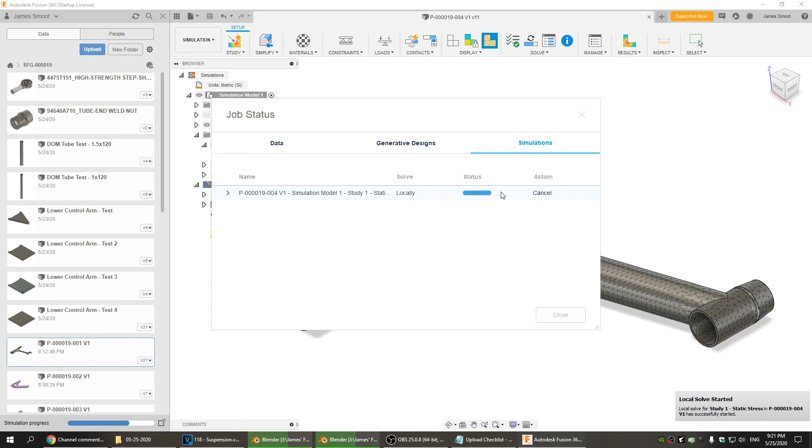Solve, locally solve. Oh wait, nope, cancel, cancel. Sorry, my bad, the constraints are wrong. Delete. Manage contacts, bonded, okay, I gotta redo the constraint. Yep, that would have been dumb. To these, okay.

Save, solve, local solve. Okay this should go pretty fast honestly. Scheduled? Scheduled, I said local. Scheduled what? What are you scheduling? Oh hell, okay I'll come back when this is done.

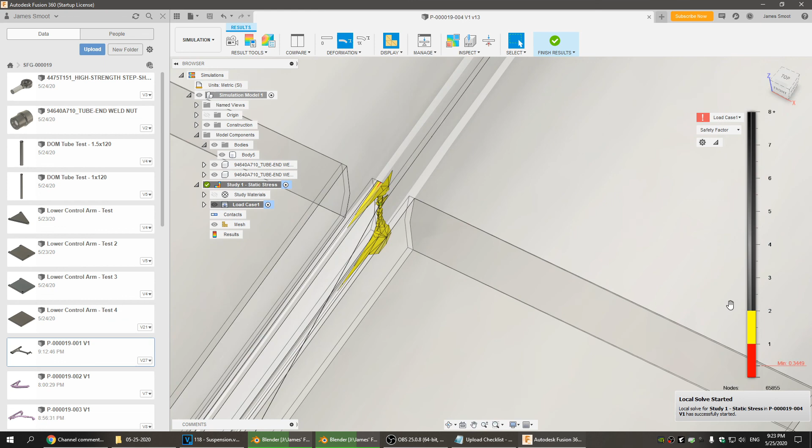Okay so it's done, so we can kind of take a look now. We just scroll down to 2, a safety factor of 2. You can see that the only part that really... oh let's go down to 1. The only part that really failed is right here, and those are just errors in the simulation.

Nothing else came close, so now there are some spots here on this pipe that are about 1.5, so 2,500 pounds, something around there. So I would say that this design is more than strong enough to support an off-road adventure. The problem is we need to 3D model the actual ball joint so that we can properly design the lengths and style of the tube.

Basically have to do all this again. It won't take as long since I have some of this done and ready, but basically these results are good. These results show me that I'm on the right path. Just going to have to 3D print a test model to figure out what's going on with the clearance of the wheel and tire.

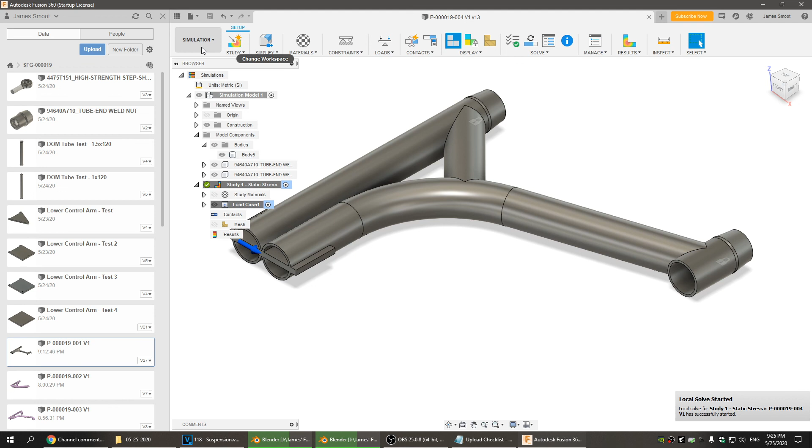Hopefully the 3D printed model would be strong enough to actually survive. I mean, I could make a solid pipe, it's a lot of plastic though, but anyway. So if we go back to design, and okay we can close this, then we can go back to this one with all our stuff, because I'd have to 3D print this Heim too.

So the problem though is that this here is actually 18 millimeters. So we need a Heim joint that can use an 18 millimeter bolt, and then we need to add like a spacer for the Heim joint to... for the Heim joint to... wow, I am out of it today.

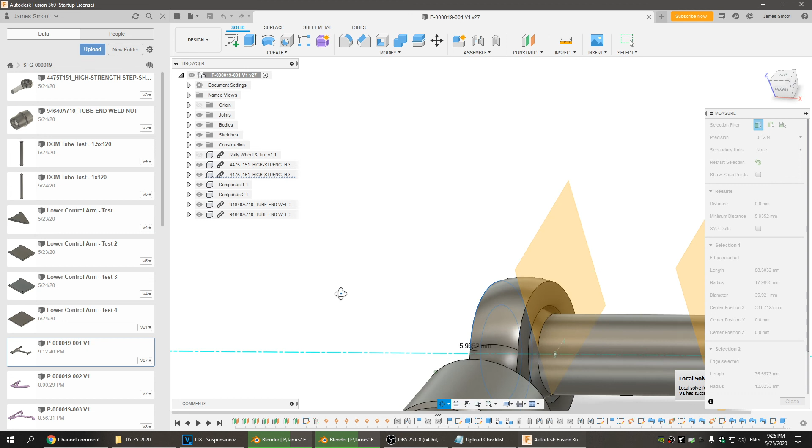It's clear, and usually that's like, you just get a spacer that's the same length as this, a 6 millimeter spacer, I mean really not much at all. And that will ensure that you have all the space you need. In this case, the car itself has an 8 millimeter, so you could just go with that.

Just do an 8 millimeter spacer, which means that all this will move this way 8 millimeters, and then same here, this will move this way 8 millimeters. Oh, that's actually... that might end up, I might end up having to redo a lot of this. I probably will do it off camera and then come back when it's ready.

But anyway, so I kind of walked you guys through how to build your own tubular A-arms from scratch, how to simulate the proper strength, and then how to design the tubes, how to simulate the tubes to make sure they work.